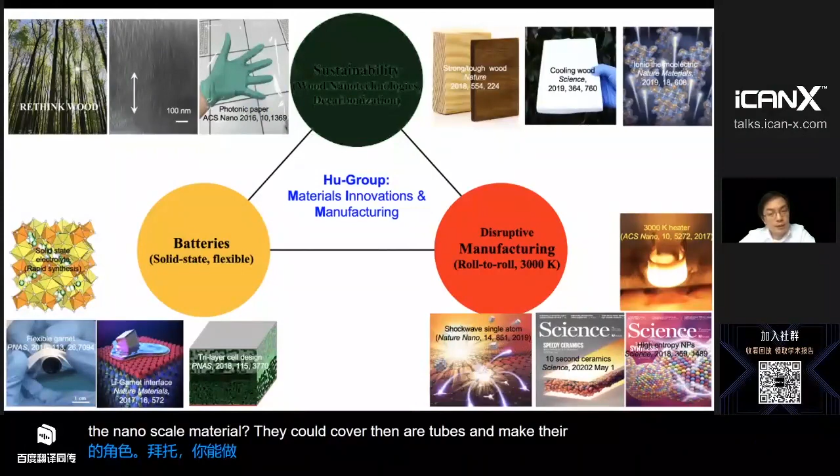So I spent a few years in Silicon Valley working for a startup company doing roll-to-roll printed electronics, basically taking nanoscale materials like carbon nanotubes and making them into inks, and doing this rotary printing for flexible, low-cost electronics. Because of that research experience, very often I take a manufacturing aspect into my research portfolio.

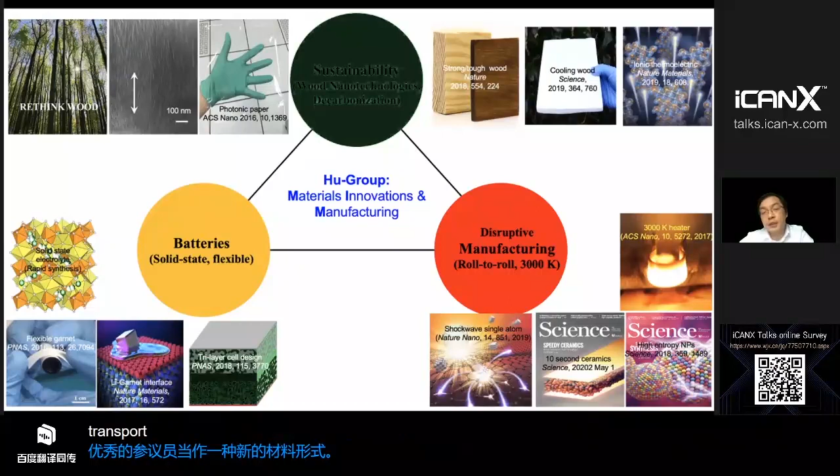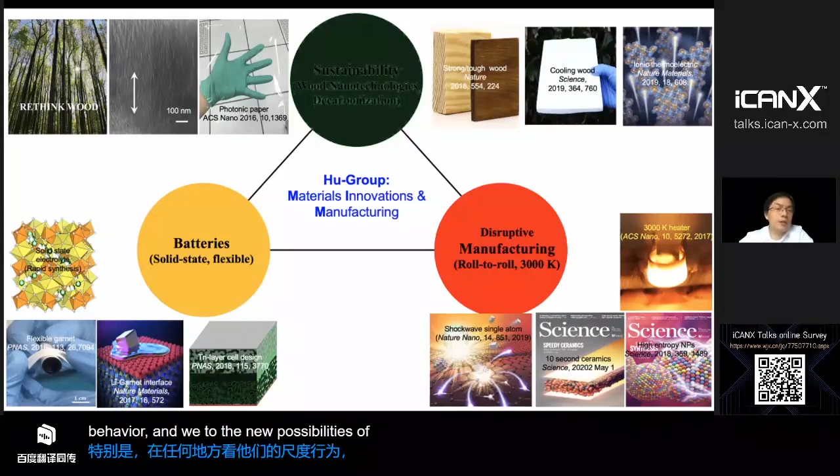Currently my group is working on 3 major research directions. The first one is called wood nanotechnologies, which I will elaborate on today. We treat wood or cellulose as a new material platform, and engineer this material to tailor the optical, mechanical, ion transport and fluid behaviors in these wonderful materials. Particularly, we are looking into the nanoscale behavior, and we are looking into new possibilities of this old material by studying in a new region of this hierarchical structure.

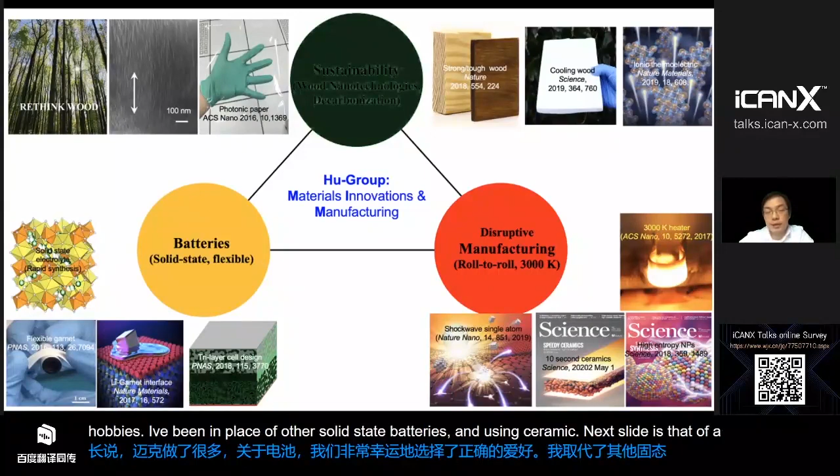The second research my group is doing a lot is about batteries. We're very fortunate to choose the right topic, I believe, about solid state batteries. Using ceramic electrolyte instead of organic electrolyte, we can potentially address the safety and energy density aspect at the same time. Very often when we increase the energy density of a battery, the battery material, the battery device itself becomes potentially more dangerous because you have more energy in a very small volume. If you have a fire because of the organic electrolyte, you have even more severe consequences.

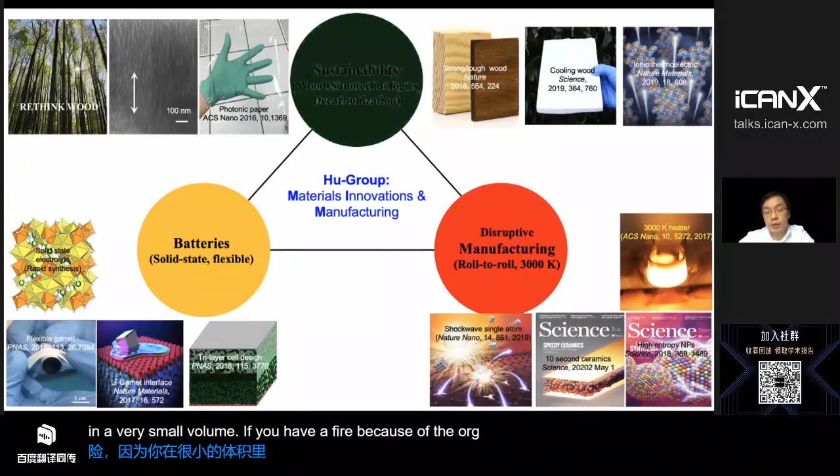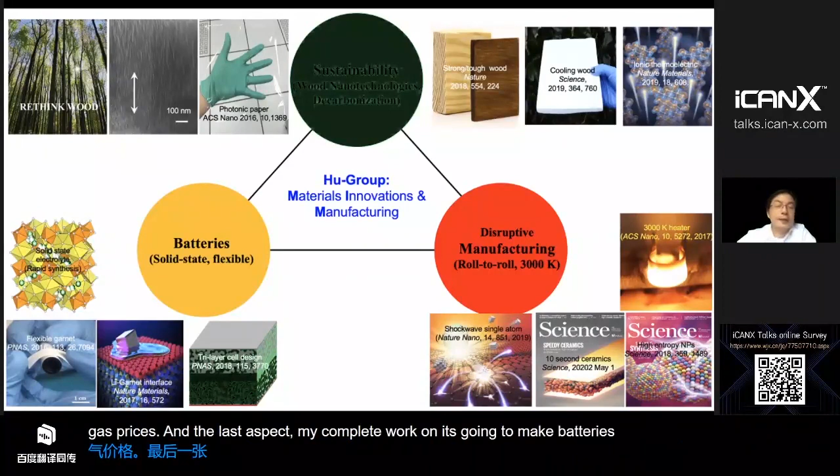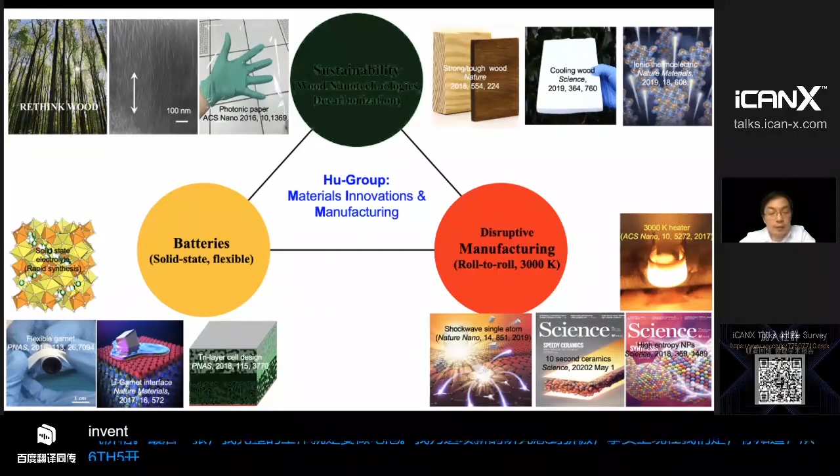And the last aspect my group is working on is called manufacturing. I'm very proud of this new research direction, we started about 5 or 6 years ago, and we invented this process called extreme high temperature thermal shock. By tuning the duration of this high temperature process, we can make all kinds of very interesting materials.

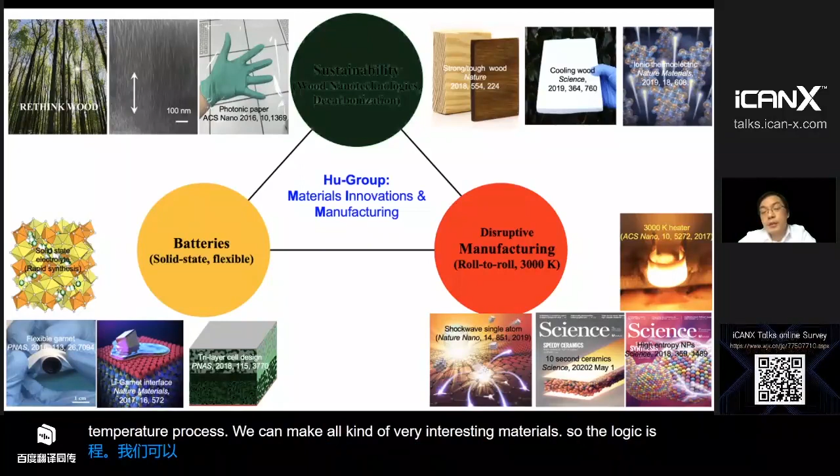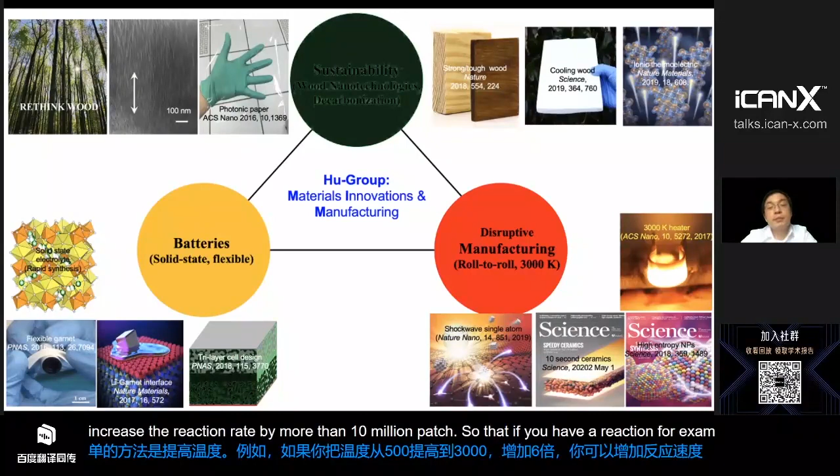The logic is very simple. When you're trying to make new materials, you want to make it fast. The easiest way to increase the speed is to increase the temperature. For example, if you increase the temperature from 500 to 3000, by 6 times, you can increase the reaction rate by more than 10 million times. So if you have a reaction, for example, if you're trying to make a glass window that takes about 10 hours to make, you could potentially make it within a second if you do everything right. So we are actually exploring this new manufacturing platform for new material discoveries, and because it's very fast, you can potentially manufacture it at a very rapid scale.

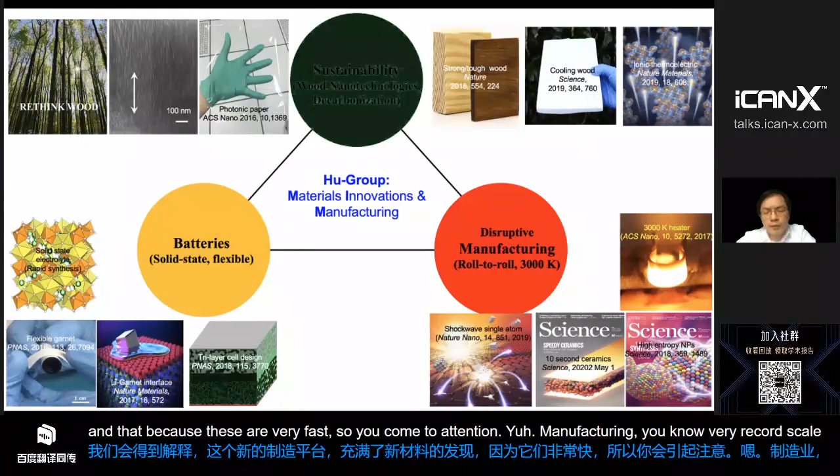I don't have time to talk about this research topic today, but hopefully in the future we have another opportunity to share this research portfolio.

Today I'm going to focus on wood nanotechnologies. If you look into the future, mankind is going to face a lot of challenges, as we're facing right now with this COVID-19 situation. We need to be prepared for the future.

If you look around, there are two kinds of materials. The materials made by nature, like leaves and plants, materials that are made by nature every day, and they are biodegradable - that's one of the key features of this category. The other category is human-made materials like steel and glass, and usually they have very poor biodegradability, they exist in nature for hundreds of years.

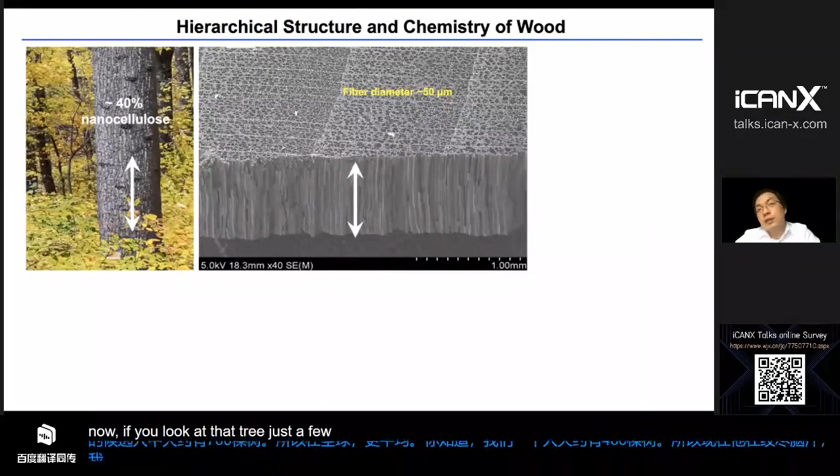So now it's really about how can we use this material. If you look at the tree, just stand in front of it and look, this material has an anisotropic structure, meaning the tree grows in a certain direction. If you zoom in further, you see these interesting porous structures - these tubular materials. You can see the channels here.

These tubular structures are glued together by this so-called lignin - it's like a glue. And that's actually why you have this wonderful mechanical properties, the fluid transport properties in trees. The trees can grow to a very large height without breaking up, even with very large wind blowing on it. People have known this material for thousands of years.

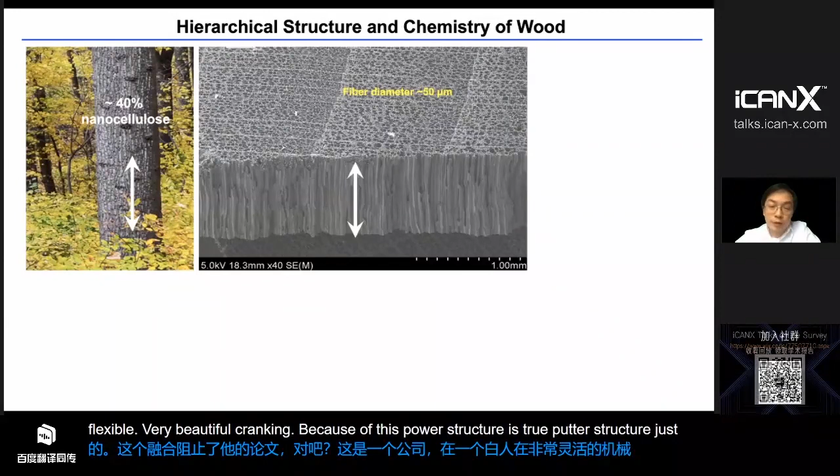If you take the lignin away between the tubes, you get these pulps, the paper pulps. That's actually the building block of this paper. It's completely white, has very good mechanical properties, flexible, very good for printing because of this porous, tubular structure - it's hollow in the very center. So that's how far we have been using these materials.

There has been a lot of development in nanoscience and nanotechnologies, and people are always looking for nanomaterials for enabling new technologies. I was very intrigued by the structures of the cell wall. If you look at the cell wall of these big tubes, you see these tiny nanofibers with a diameter of about 5 nanometers.

That used to be very exciting when you see that. They are partially aligned. If you look into the structure even further, it's just like you keep tearing the fiber - if you have a magical hand and keep tearing it apart, you will see the fiber itself is made of even smaller fibers, and ultimately it's made of glucose chains with a length up to 1 micron, with a lot of hydroxyl groups on the surface.

As I said, this cellulose has a very long molecular chain - the molecular weight is very, very large. It's a macromolecule. And you have the lignin - the lignin itself is much smaller, same as hemicellulose. So I'm a physicist by training, I don't know this material at all.

When I actually got to know this material, I was more interested in how to use this cellulose fiber as a building block, instead of the very complicated chemistry of lignin and hemicellulose. So my research really focused on the cellulose fibers using these materials. We hope that by doing engineering, we can really take advantage of nanoscience and nanotechnology, using this cellulose nanofiber as a platform, while everything else keeps the same.

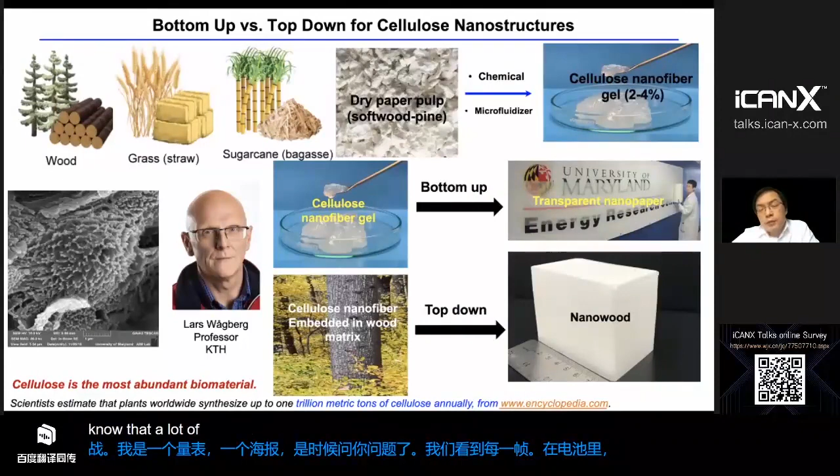I learned this material from Professor Lars Wågberg when I was still a postdoc at Stanford University, doing the battery research. We were trying to use this material for batteries. There has been a lot of development using this cellulose nanofiber, and we have done a lot of work such as transparent nano paper, nanocellulose batteries, and so on.

I won't have time to discuss all of that today. When you use this nanomaterial, even though it's very cheap, we did find a lot of potential challenges, just like any other nanomaterial - it's very hard to process. One major reason is because we need to use a lot of water. For example, in this gel, about 98% is water. So even though the material is cheap and abundant, the use of water and energy to break them down is going to be very expensive.

So about 5 years ago, I started to think about what are the potential manufacturing routes to address these issues. As we looked into that, we found the manufacturing research actually guided us to look into the anisotropic feature of wood, and by doing so we get more opportunities. For example, this is a piece of wood, 100% wood - nothing embedded inside, no dye, no color, no fillers. We get all this aligned cellulose fiber inside this so-called nano wood. Now you can imagine tailoring the channel length, the optical properties, the fluid transport, and so on. I think this becomes a new platform here.

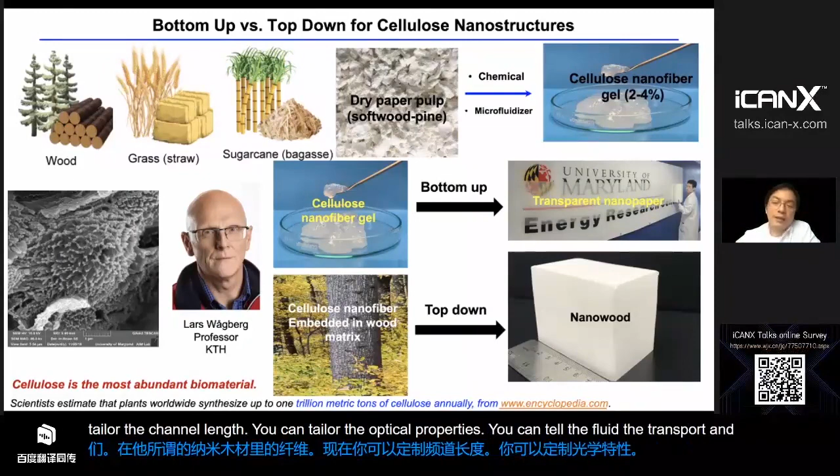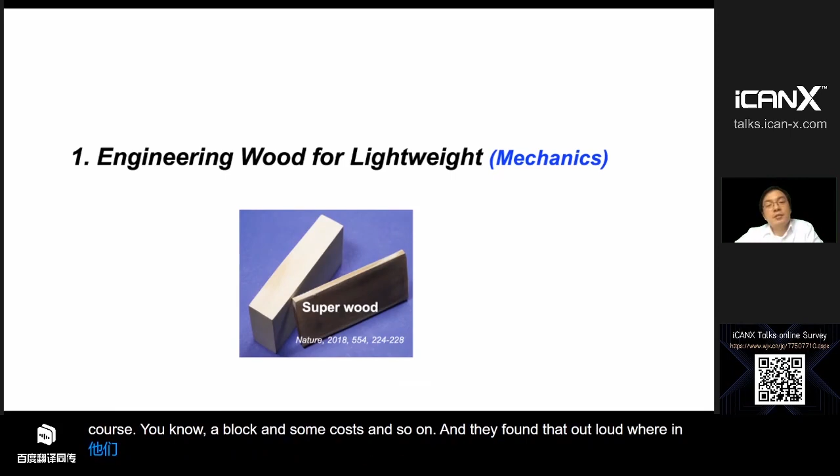So today I'm going to give you 3 examples of how we engineer wood. I personally believe by using this top-down approach instead of bottom-up - where bottom-up means you use nanofiber and build up things, top-down means you use the wood and don't change the wood itself, but do things within the wood, like changing the lignin, changing the hemicellulose, changing the pores, blocking some pores, and so on. We find there is a lot of very interesting physics behind it, and associated with all these structures and physics, there are a lot of potential applications.

So the first work is about lightweight structures, and I did this work through very close collaboration with a very good friend, Professor Teng Li at the University of Maryland, in the mechanical engineering department.

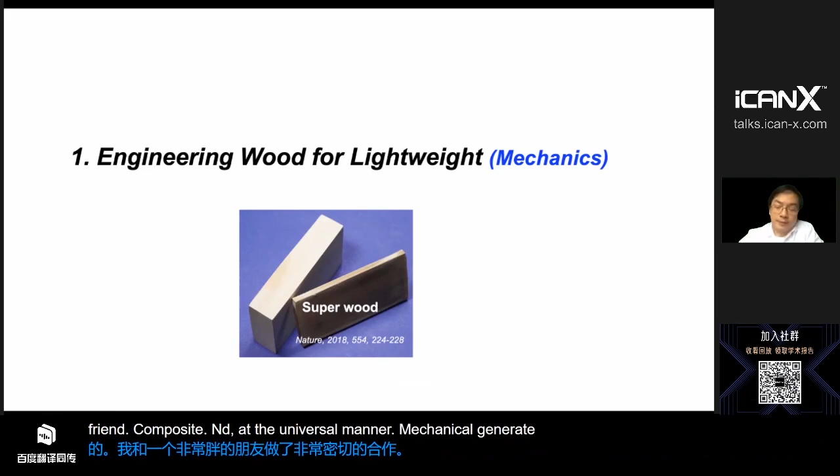Now let's look at the mechanical property of paper or wood. It's actually very boring - the mechanical property of paper is about 20 to 60 megapascals. It's good for printing paper, but you're not going to build a building or a car using paper. And wood's mechanical property is almost the same, like 20 to 60 megapascals. It's good for some buildings, but you're not going to use it for a skyscraper, or for lightweight cars as a frame.

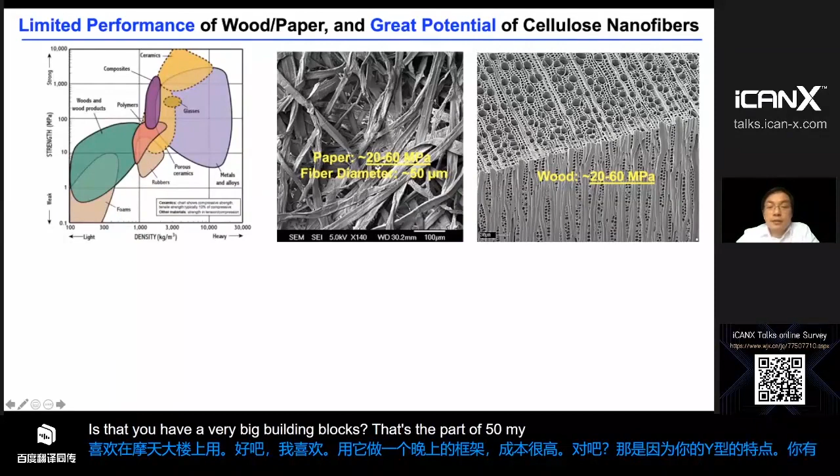That's because of two features here. One is that you have these very big building blocks, about 50 microns. But the second thing is that you have these very porous structures. The porosity is almost about 50% in either structure.

At the same time, remember, these big fibers are made of many, many smaller nanofibers. If you zoom in, the nanofiber has a diameter of about 10 nanometers, and the strength is about 7 gigapascal. The best steel, the strength is about 1 to 2 gigapascal in your car. And the best carbon fiber, the strength is only like 4 gigapascal, at most 5 gigapascal.

Many people are trying to develop new technologies to replace steel, replace carbon fiber. And this material, made by nature every day, has a strength up to 7 gigapascal.

At the same time, this is not held by a primary bond, like a metallic bond as in metals, which takes forever to decompose in nature. This is actually made with hydrogen bonds. The hydrogen bond energy is very, very small, each one. But you have all these hydrogen bonds everywhere - about 2,700 hydrogen bonds per molecule chain per micron.

Because of that, each bond can be broken, so that means this material is very strong. But if you put it into nature, with the help of sun and water, this material can be decomposed. So this gives you a very good combination of excellent mechanical property and biodegradability. It's very good for your use, and it's very good when you're trying to dispose of it.

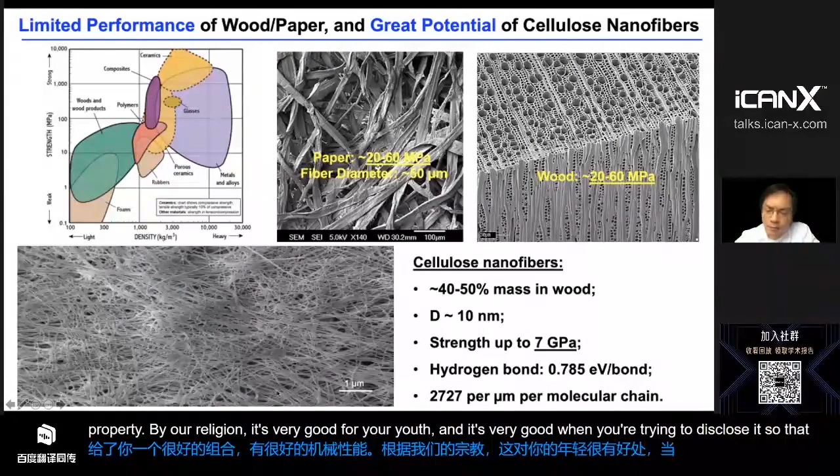So that's another very important feature of nanofiber. Now, if we want to use this nanofiber, what do we do? We have to break them apart.

We've done two kinds of scaling behaviors. One is with diameter - this was done by Hongli Zhu, now a professor at Northeastern University, Boston. We were able to break the fiber down to smaller and smaller scales and make paper again, using these bigger fibers, smaller fibers, and the smallest fibers.

We do this stress strain test and get this ultimate tensile strength when this material starts to break. We found out this mechanical strength indeed follows this kind of quasi-Hall-Petch related equation, meaning if you decrease the diameter of the fiber, you increase the mechanical strength dramatically.

You can almost increase the strength by up to 100 times, because when you decrease the diameter of fibers, you have fewer defects, the material becomes much denser. If you have big fibers, you have limited interaction bond contact areas. If you decrease this diameter, you have more interaction and smaller defects, and so on.

The other thing is the toughness, or the energy to break this material. You do the integral of the stress strain curve, and you get this toughness. We found the toughness also increases as you decrease the diameter of the fiber, and this is untraditional.

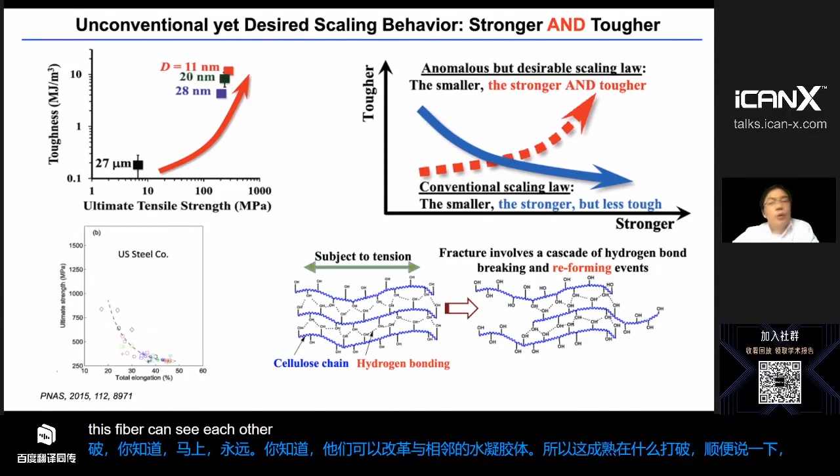We also studied another kind of scaling behavior: alignment. If you try to increase the mechanical property of fiber materials, certain contact points give it mechanical strength. If you align them, you maximize the contact area and can increase the mechanical strength. This indeed happened - we carried out this research using bacterial cellulose fibers.

And we stretch them when it's still wet in water, and we take it out and dry it. Then the hydrogen bonds will be formed, and you have this increased mechanical strength up to even 1 gigapascal. This is actually better than many steels, using this cellulose, the bio-based material. We published this paper quite a few years ago.

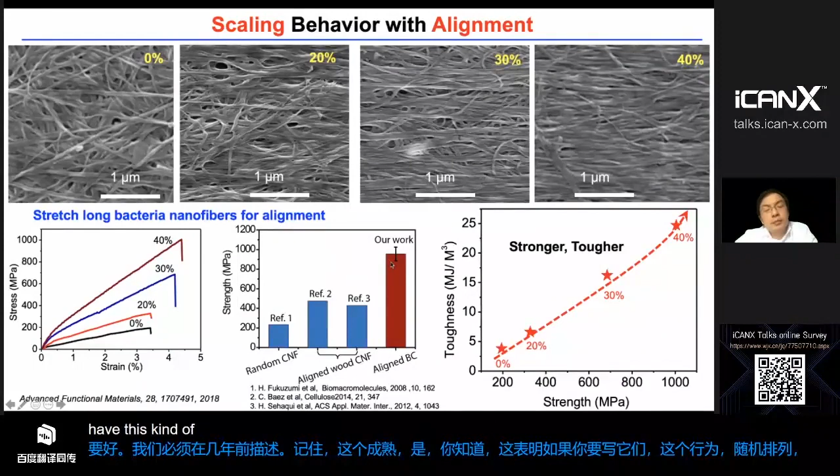Remember, this material shows you that if you have a random arrangement, this is the mechanical property you have. If you have alignment, you have this kind of much improved mechanical strength. The same thing is actually true for the toughness.

So now we know that in order to use these cellulose nanofibers, we want two things. We want the nanofiber, and we want to use them in an aligned fashion. And coming back to my original point, we always have manufacturing challenges. For any technology to be useful, you have to overcome the manufacturing challenges.

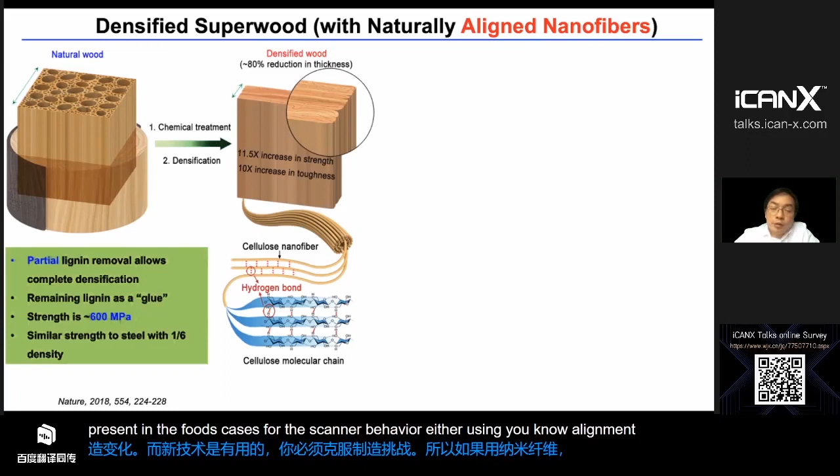So if you use nanofiber, using the bottom-up approach as I presented in the previous two cases for the scaling behavior, either using alignment or using a microfluidizer to break them apart, that uses about 98% water. And that's a lot of energy associated with that.

Remember, cellulose very often comes from trees, and they are actually partially aligned. Wood is actually an anisotropic structure. They grow in certain directions. And the building block is cellulose nanofibers.

We are very lucky to have proposed this concept quite a few years ago. We have a patent on this: let's use the nanofiber as they are in wood, but let's try not to follow what the paper industry is doing.

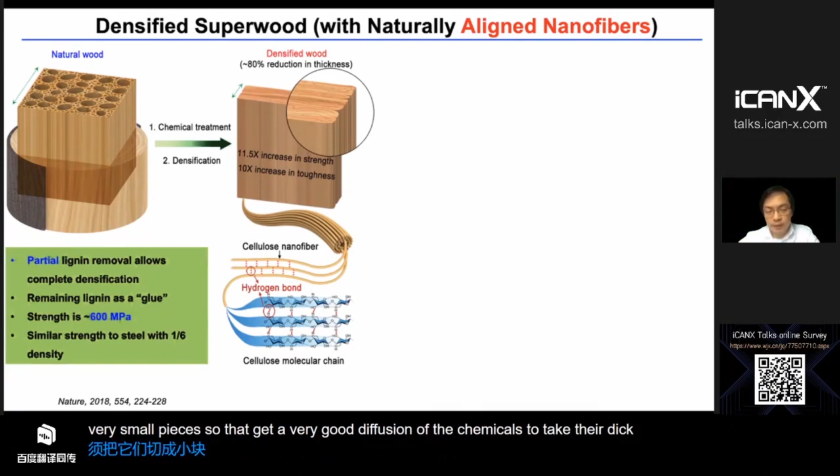In the paper industry, they take the wood, cut it into small pieces, and do this pulp treatment to remove the lignin. They have to cut them into very small pieces to get good diffusion of the chemicals to take the lignin away. But in this case, we want to use this anisotropic structure.

So in this innovation, we remove some of the lignin, so the wood itself becomes soft. At the same time, we apply mechanical force to break them down, to break down the channels, and you get this densified structure. So you have all these aligned nanofibers inside, and they are aligned.

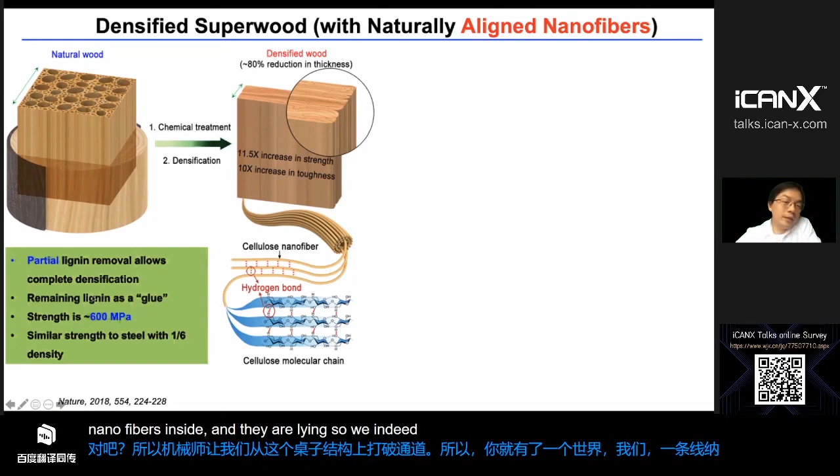So we indeed get much better mechanical properties, and at the same time the whole structure has a density of about 1.3 to 1.6, 1.5 grams per centimeter cubed. It's much denser than the regular starting wood, but the density is still 6 times smaller than most steels. So this is what happened in the laboratory.

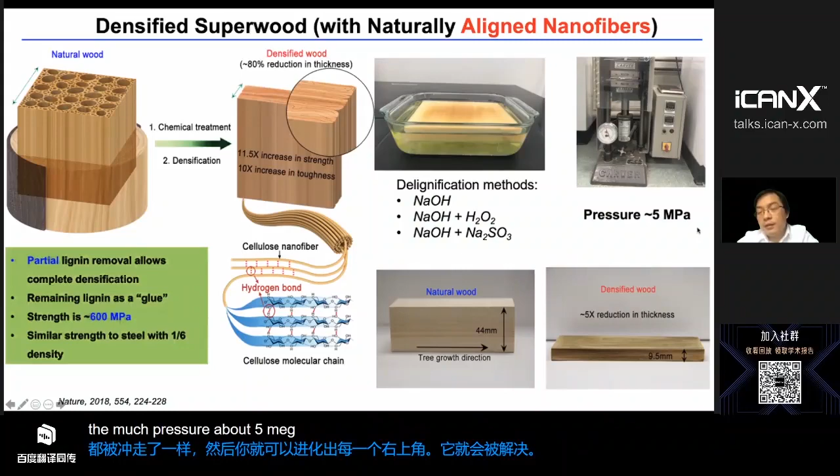It's actually very simple. You just take the wood, cook it using chemicals and some temperature, and the lignin—just like you wash your cloth—will be leached out. The wood becomes soft, and you press it using not much pressure, about 5 megapascals. Again, during the drying process, the hydrogen bonds form, and you have this very strong, tough material.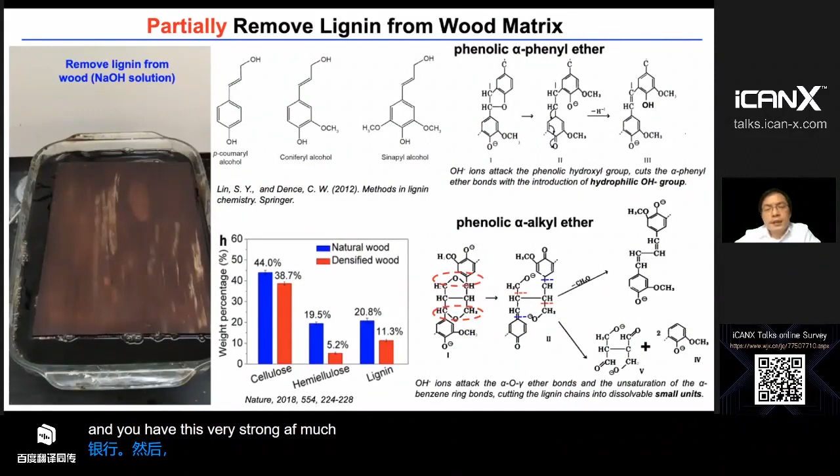So this is what happened in the laboratory, again just like washing cloth. What's happening here is that we're using sodium hydroxide. This is the lignin building block—it's actually a very complex amorphous structure.

In one case, they can actually introduce hydrophilic groups, meaning this material will start to like water and can dissolve into it. In the other case, you can use hydroxide groups to break this kind of alkyl ether group, breaking down these very large lignin macromolecules into small molecules. When they're small, they're easier to leach out and dissolve into water, so you can remove the very rigid lignin.

So this is what happened in the composition studies. The lignin remaining is about 50% of the original lignin. The cellulose in this case still retains most of its original mass. That's what we wanted—we want to use the cellulose, not the lignin, because lignin causes problems for densification.

So we do this mechanical stress-strain test, comparing natural wood and densified wood. You can see the tensile strength is increased more than 10 times, and the toughness is also increased about 10 times.

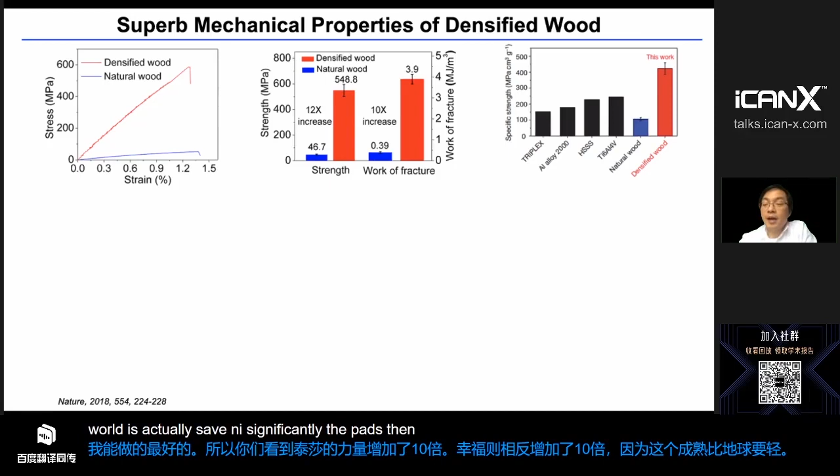Because this material is very lightweight compared to steels and even the best lightweight metals, the specific strength of this densified wood is actually significantly better than titanium alloy lightweight metals.

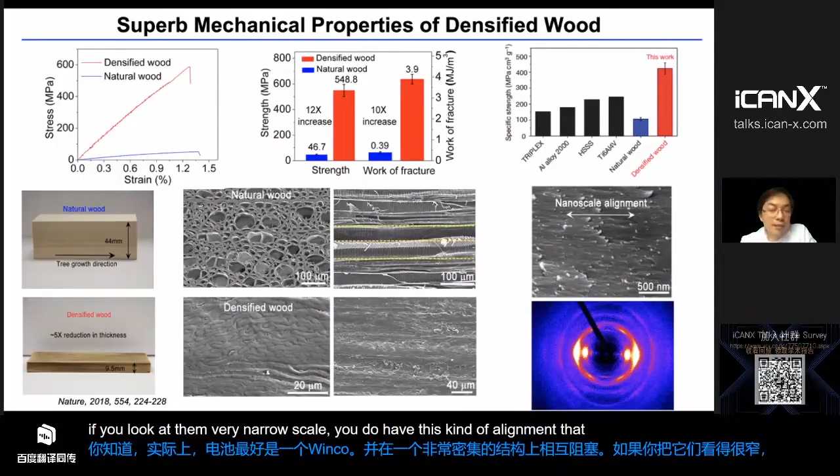If we look into the structure, you see this is natural wood with very big channels. They are actually defects from a mechanical point of view. You see how the cell walls are wrinkled and lock each other, forming very dense structures. And if you look at the nanoscale, you have this alignment that maximizes the interactions between the building blocks.

We've also done a lot of other tests, such as bending in different directions, and we increased strength by a lot compared with natural wood. For building applications, we care more about compression. We compress in three different directions, like in the growth direction, perpendicular to the growth direction, and so on. They all increased dramatically compared to natural wood.

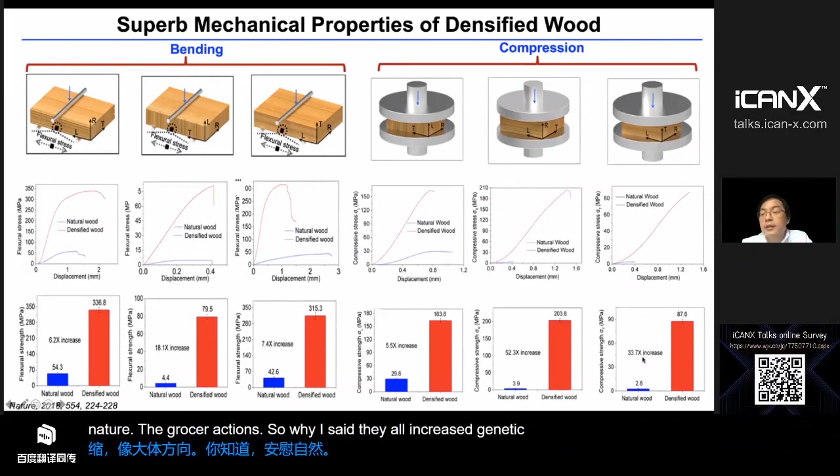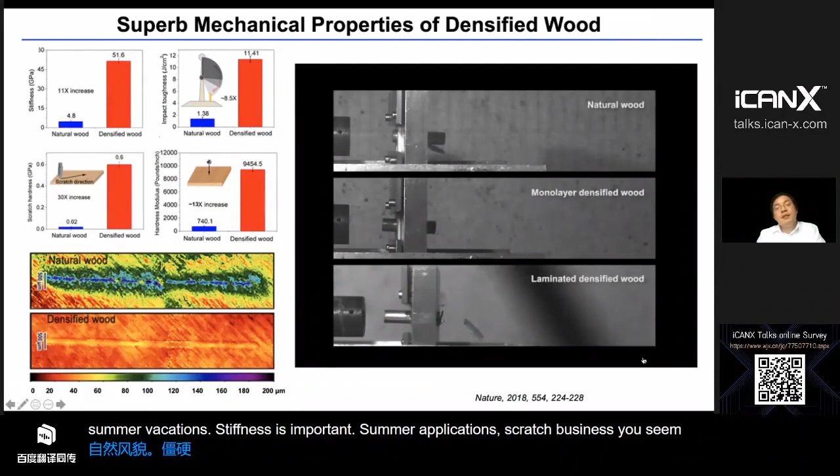For some applications, stiffness is important. For some, scratch resistance is important. And sometimes impact resistance is important. We've done some bullet tests, and we see the densified wood can catch the bullet in different ways. With natural wood, the bullet just passes through it. So what this test tells us is that we indeed improve the mechanical properties in all aspects.

And this really comes from the structure of these materials. From the macroscopic scale, from the large scale, you have these aligned structures, very dense structures without pores. It's made of tubular structures, where the cell wall is closed. So they also form this kind of very good laminate structure, and they are also aligned. Each tube is basically pressed into something like a pellet.

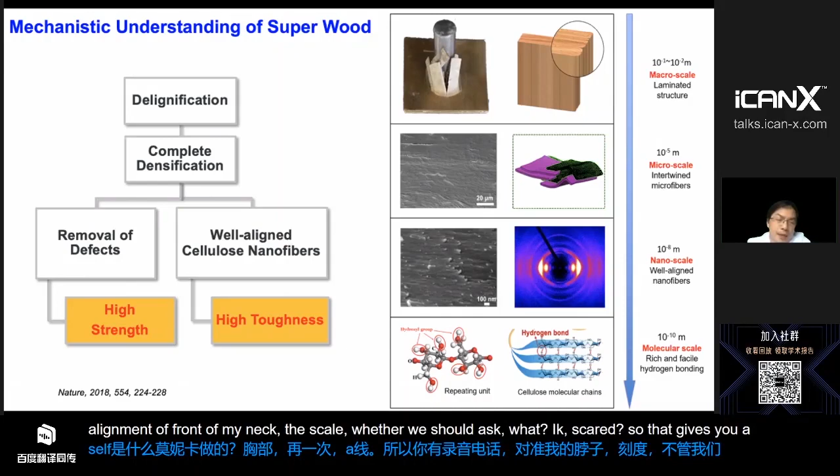And you have these nanoscale fibers - that's the building block. Each nanofiber itself is made of all these molecular chains, and again, they're aligned. So you have hierarchical alignment from the molecular scale all the way to the macroscopic scale. That gives you all this mechanical strength and toughness. We believe the strength comes from the removal of defects, and this aligned hydrogen bond-based structure gives you this very good toughness.

And this process is actually very universal. That means you can apply this process to different kinds of trees - either oak trees, poplar, pine, very cheap fast-growth trees, or very expensive dense trees. Ultimately, all these trees have very similar building blocks. The difference is mainly in the macroscopic scale.

They have some with big pores, some with smaller pores, but after we densify it, they become the same structure. They're all dense. The building block is all cellulose nanofibers, and you have lignin inside. So that basically gives you a very universal kind of mechanical behavior.

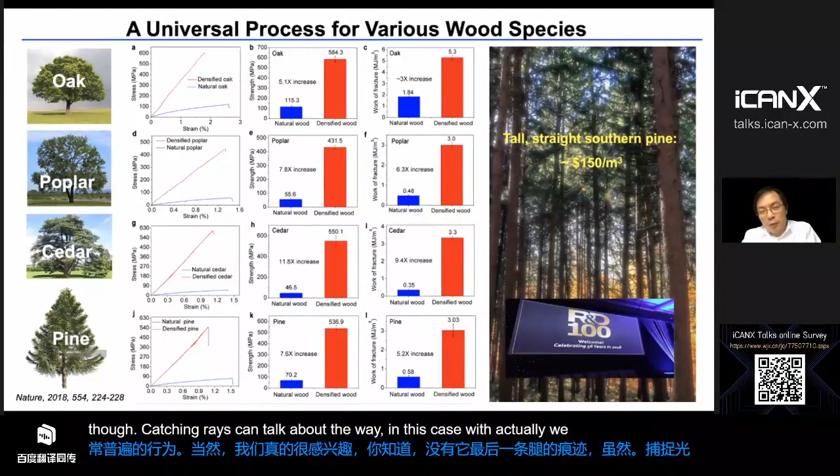And of course, we're really interested in very straight trees with less leaves - I know Professor Gino is going to talk about the leaves. In this case, we want just the trunk itself. The cost is about $150 per cubic meter, and we actually won the R&D 100 award for this.

So I think superwood can really enable a lot of technology possibilities here. And we are lucky to get funding from the DOE in the United States to work on car integrations. The idea is very simple.

When you drive your car, think about this - your car weighs more than yourself. So when you say I'm going to drive a car, you are really driving a car, not driving yourself. But to save weight, you really want to drive yourself - but then you don't get the safety. So you want a lightweight car that also has very good mechanical strength and toughness.

That's the motivation. On average, if you save weight by 10%, you can increase energy efficiency by about 8%. And if you're talking about flight systems, like airplanes, it's even more - if you save weight, you can save more fuel and more cost. And also for skyscraper buildings.

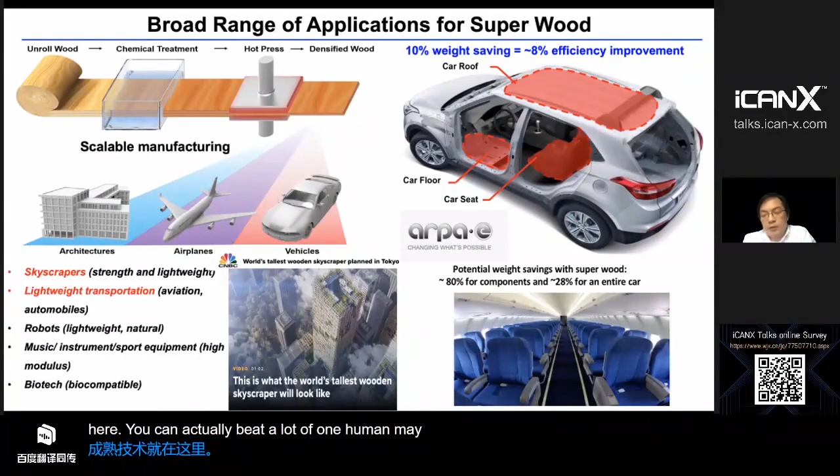Transportation—cars, airplanes—is about 40% of total energy consumption. When you're on the road, taking the train, driving your car, you're spending a lot of energy. When you're not traveling, you're usually inside a building, and building consumption is also about 40% of total energy consumption.

So I'm going to tell you how we can engineer wood for building technologies. In this case we care about the light effect and thermal comfort—how can we see things in the daytime, how can we have the best lighting effect, and how can we have the best thermal comfort?

If you look at a building, you have windows. A window is a very bad component in terms of energy efficiency, but you like a window because it gives you visibility, comfort, and so on. The other major energy leakage is your envelope, the walls—either stainless steel or regular wood—which don't give you the best thermal protection.

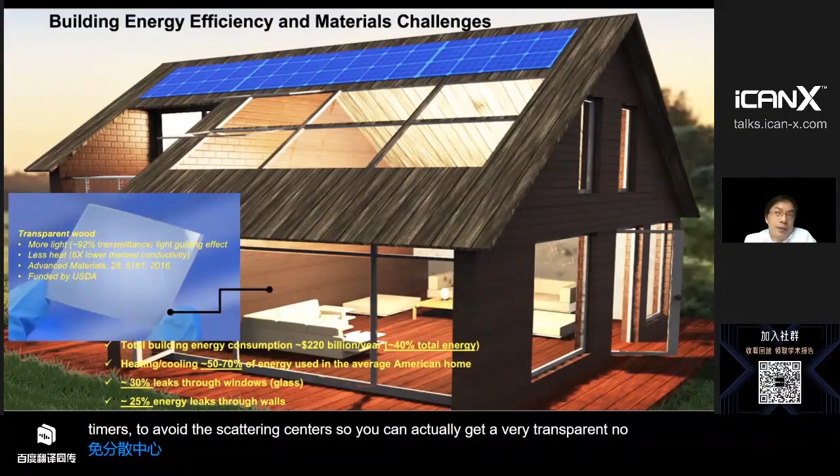My group has been working on these kinds of technologies for quite a few years. The first work was by Mingwei Zhu, a visiting scholar in my group at that time. We invented this so-called transparent wood. Basically, we remove the lignin that absorbs light and fill it with cellulose or polymers to avoid scattering centers. So you can get a very transparent, very low thermal conductivity wood that maintains optical comfort but avoids thermal leakage and increases energy efficiency.

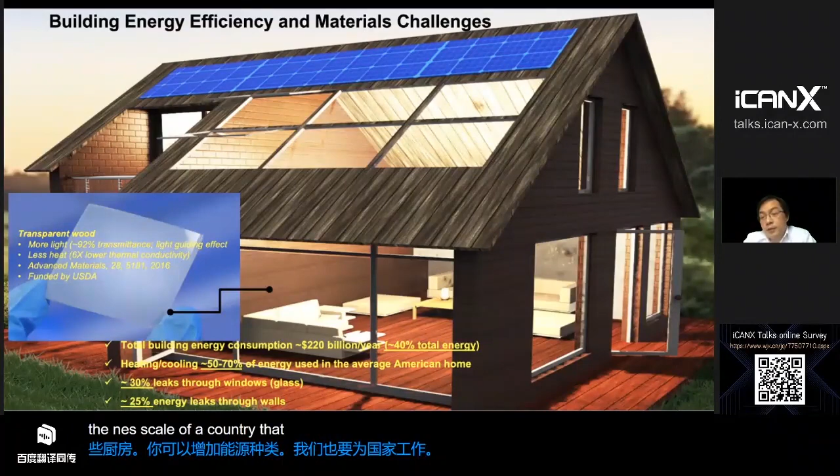We've also done work on thermal insulation wood. It's a structural material, and in this case we're talking about a length scale of about 100 nanometers for thermal management. By doing so, we can lower the thermal conductivity dramatically. Now this project is funded by the DOE BTO office, and we're trying to commercialize this technology through InventWood as well.

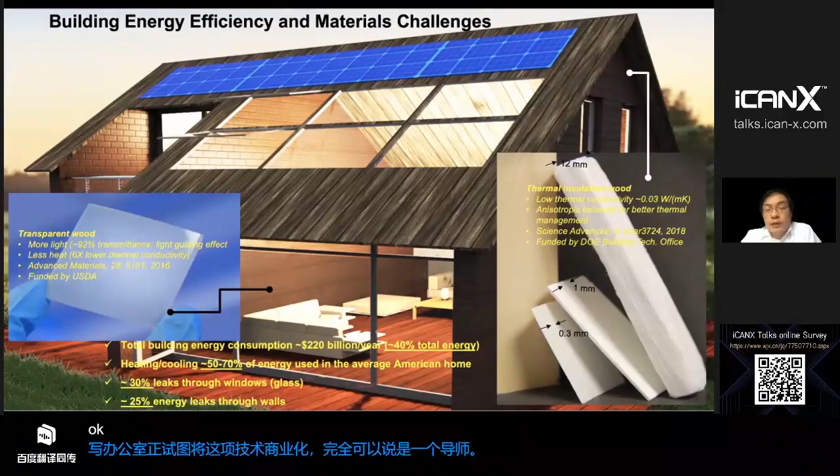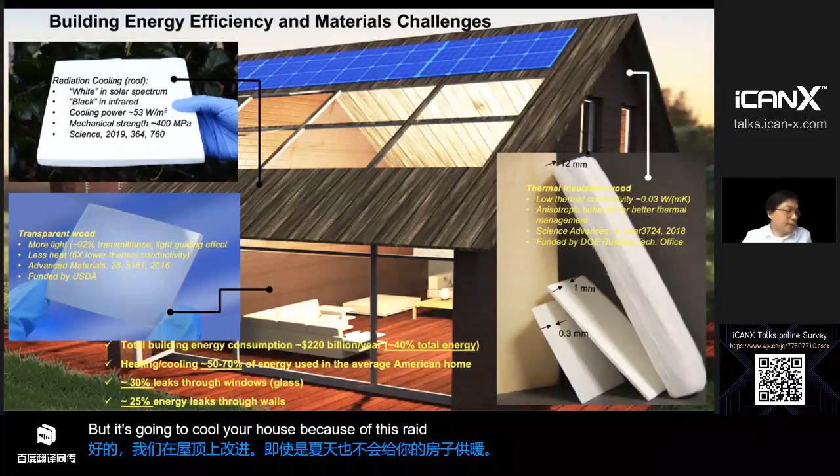So today I'm going to focus on this so-called radiative cooling wood. This is a cooling wood that, when you put it on a roof, is not going to heat your house even in the hottest summer—it's going to cool your house because of this radiation effect. Because of time, I'm going to speak relatively fast for this concept.

Now think about this: this is your house, this is the building, this is the cloud, and far, far away is the universe—that's very cold. Then you have the sun, which is very hot, about 6,000 Kelvin. So if there's no sun, you should always feel cold because the universe is so cold.

If you look at this cloud, you have transmission windows, and from 8 to 13 microns you have very high transmitting windows. Now let's say your house is at room temperature, say 300 Kelvin, and this is the black body radiation curve. This window is transparent, so if there's no sun, your house is going to radiate all the heat through this transparent window, and you're going to have a very cool building, even in the summer.

But the problem is that in the summer you have this high-flux energy input from the solar radiation, which is also black body radiation at about 6,000 Kelvin, so its center is in the range of visible light. So cooling your house is really about how we can reduce the heating and increase the cooling, so overall you have a net output of energy instead of input into your building. That's why we want to make this material white, so it doesn't absorb the solar energy.

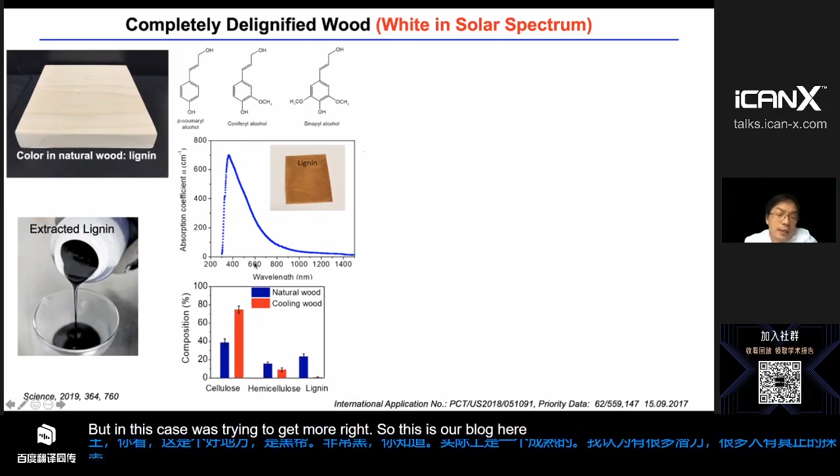So this is absorption of the lignin, and it's just black, right? That's why, if you put the wood on the roof, it's going to absorb the sun. It's going to heat your house, which is bad from an energy efficiency point of view in the summer. So this is actually a completely delignified wood.

We demonstrated this a few years ago. You may think this is trivial, but actually removing the lignin from a very big piece of wood without destroying the structure is very, very challenging. There's nothing to hold them together if you remove it, right? Then hydrogen bonds form when you drive the water away. You have to get them apart, but they're still very porous. So it's actually a very complicated task.

In this case, we have a white color because we still have a lot of scattering because of this macroscopic arrangement, right? So now let's look at the spectrum. It's very white—it's very obvious, right?

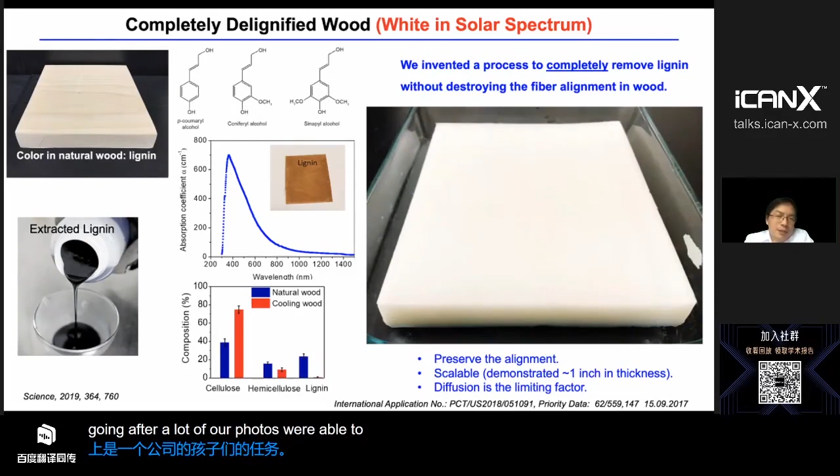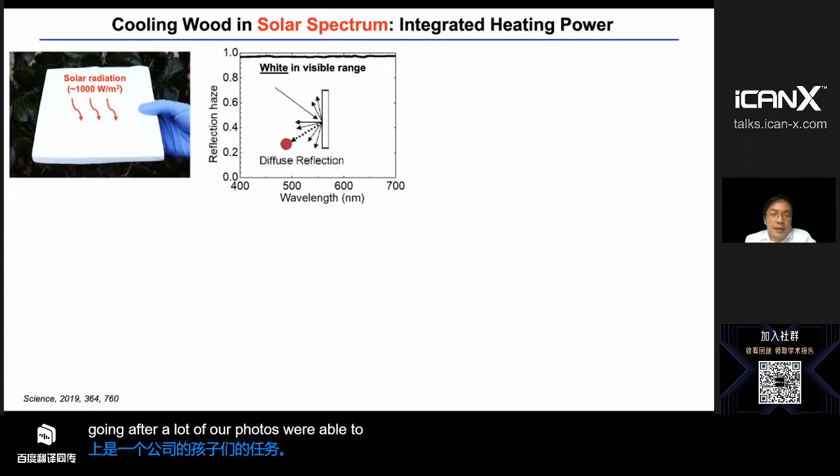And then we measure the reflections. It actually has a very high haze, meaning reflection scattered in all directions. And if you look at the transmittance, of course it's very white, so the transmittance is very, very small, almost zero. And there's very, very small absorption as well.

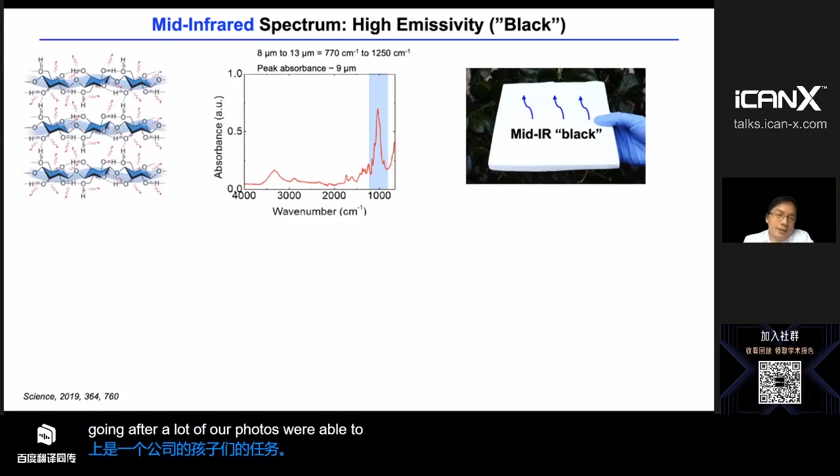Now look at the infrared. This material is actually completely black. You and I wouldn't believe so because it looks white in the visible. But this material has a lot of functional groups—CO, CH, OH bonds—and they all vibrate in the infrared. That means they're going to absorb energy in the infrared. So when you have very high absorption, that means you're going to have very high emission as well. The absorptivity is the same as the emissivity.

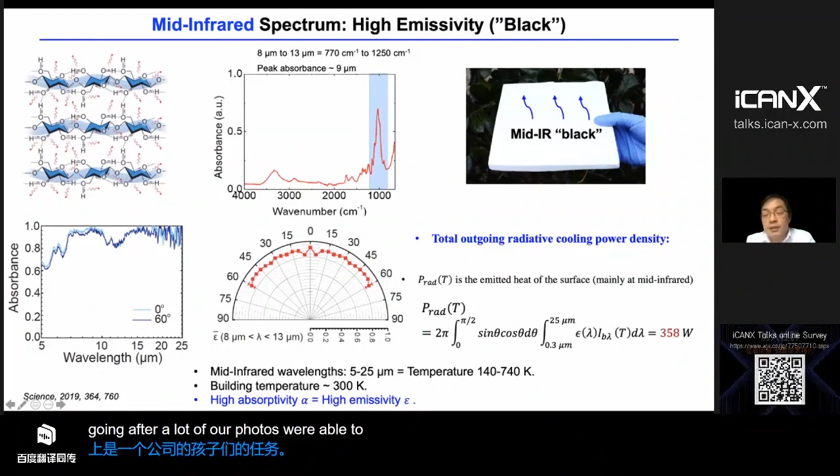Because of that, you're going to have a very large cooling effect. This is the infrared range. If you do the integral from visible all the way to the infrared, it's mainly the infrared range that gives you this huge cooling power—the energy goes away from your roof. So this number is much larger than the absorption, which was 53 in the previous slide.

Now let's add everything together. In the real case, you have convection, conduction, and back radiation from the environment and so on. But taking this wide window, the 8 to 13 micron window, if you put all these things together, you still get a net emission power of about 58 watts. So for a 10% solar cell, you get about 100 watts for about 8 to 10 hours, but this is a 24-hour operation. So this is actually even better than most solar cells from a 24-hour operation point of view.

This work was done through collaboration with Ronggui Yang and Xiaobo Yin from University of Colorado at that time. We did some real-time tests and confirmed the measurement, which agreed with the calculations and so on.

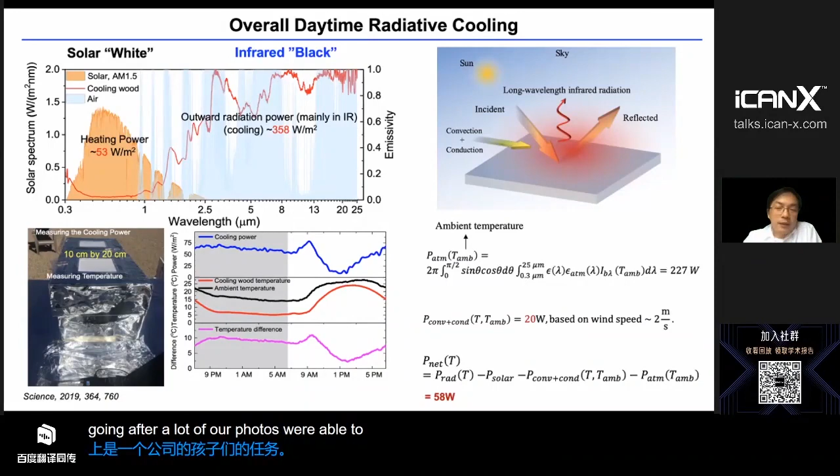So this material, at the end of the day, is very different from other radiation cooling materials. The radiation cooling concept really started with Professor Shanhui Fan from Stanford University using semiconductor structures, and there are quite other interesting works using polymer beads and multi-layer structures and so on.

This material is wood. So intrinsically, it's a structural material. And for buildings, you want the mechanical strength, you want the structure material. So we say that in this case, the mechanical strength is also like 400 megapascals, and it's very much better in terms of scratch resistance. When you use it for the building, you care about the scratch. People are going to scratch it. You have cats, things like that. You care about scratch resistance and other kinds of mechanical properties as well.

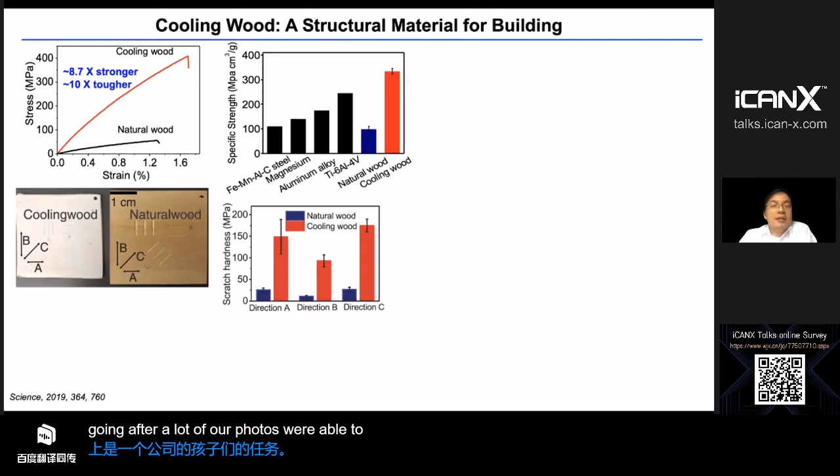And this is the specific mechanical strength. Just like before, it's also better than lightweight metals. And this material also has very, very beautiful colors, just like pure white. I think this may have applications even beyond this so-called radiation cooling.

We've done this building energy efficiency calculation through collaboration with Professor Jelena Srebric at the University of Maryland. The idea is that using this material in certain regions, you can save energy up to 35%, for certain areas like Austin, Phoenix, which only have very dry and hot weather.

So this really indicates, if we can engineer this material to play with the optical properties like transparent wood, the thermal properties like insulation wood, or this light and thermal coupling, you can have this cooling wood. And this is just one second example.

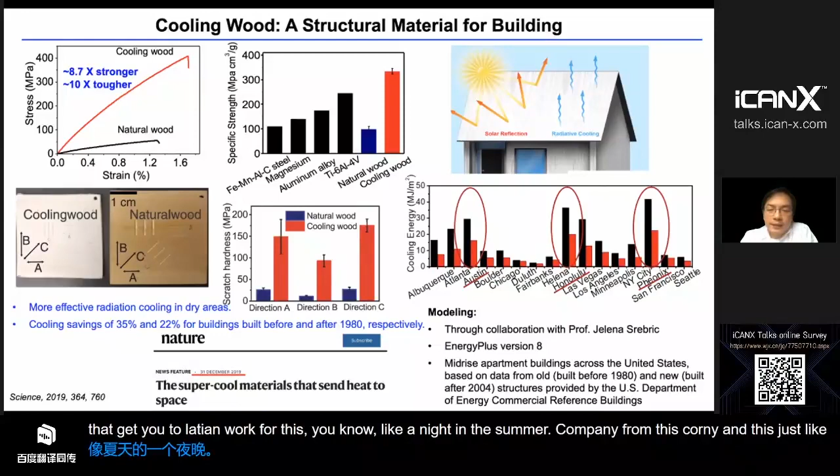So in addition to superwood, cooling wood, I'm going to give the last example very quickly. It's called ionic wood, okay? Or called nanoionic wood or fluidic wood. It's about using wood to transport ions, transport water, transport other fluidics in a guided version with much enhanced speed, with much better regulation.

For example, if we make a channel much smaller, we can selectively transport one ion versus the other kind of ions. So you can start to build a charge on one side, and you can also promote the transfer number, for example in lithium-ion batteries. That is always the key to getting fast charge batteries.

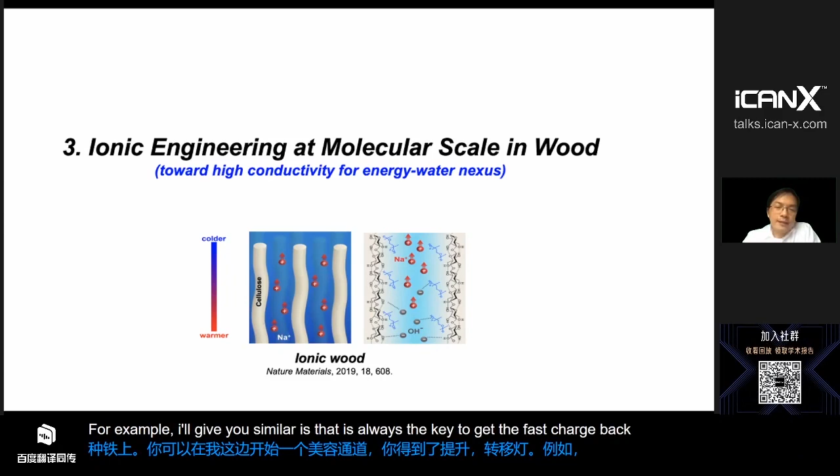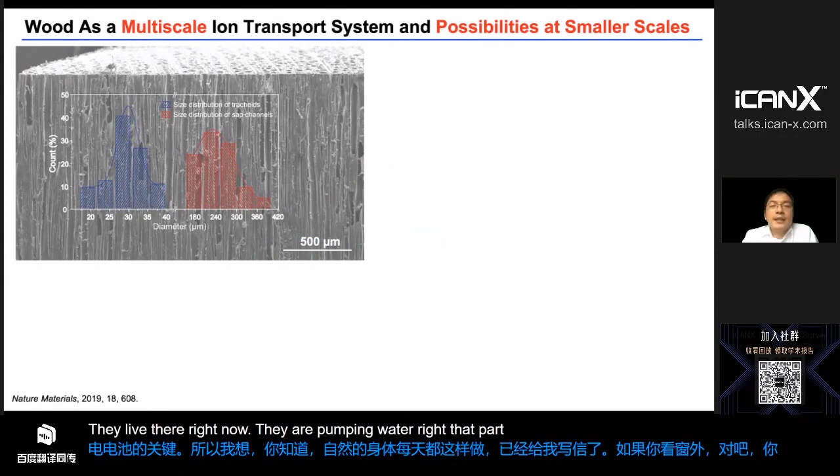So I think natural wood is doing this every day already. Right? I mean, if you look outside your window, you have the trees. They are, right now, pumping water, pumping potassium, sodium ions as nutrients for the trees to grow.

And they have very interesting hierarchical structures. They have these larger pore diameter channels, and they have smaller channels, and they have pits on the cell walls and so on. I think there are a lot of works done on these classical materials. And when we enter this field, we ask this kind of question:

How can we use this nanoscale behavior? For example, in this case, we open them up. We charge the nanofibers apart, so they start to repel each other. You open up the small channels, and you get this so-called nanoionic transport behavior. And remember, this material has a lot of hydroxyl groups. That's the glucose chains, right?

So can we modify the structure to make them more surface charged when they soak in water? They are more likely to be dissociated, so you have more surface charge, negative surface charge. Then we give them chemical modifications in addition to the physical modifications. And hopefully we can also benefit from these hierarchical structures.

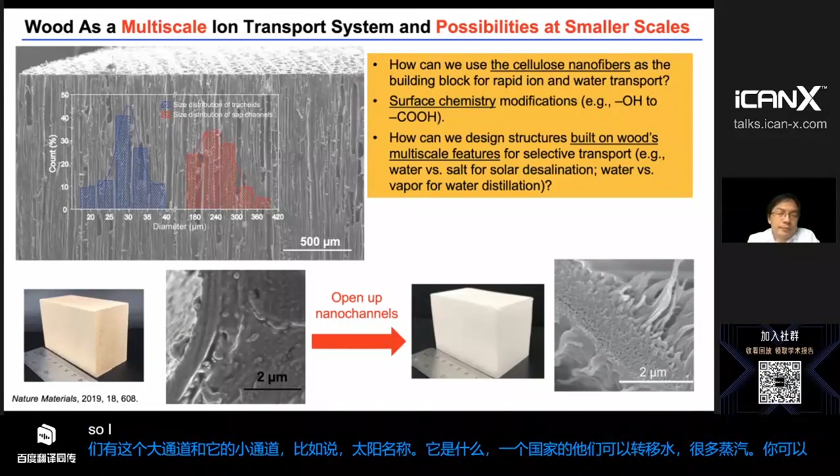They have this big channel and smaller channels for things such as solar desalination, water distillation. They can transport the water, not the vapor. You can transport this ion, not that ion, and so on. So I'll give you a very quick example about solar desalination.

In this case, the idea is to let light hit the surface of the wood. The wood surface is blackened by carbonization—very black, but only on the very top surface. So when the light hits the surface, it's going to be absorbed. And because wood has very poor thermal conductivity, it's a porous material.

So the heat is going to be focused on the surface. The surface will become very hot. The vapor will be formed, will be evaporated. And the water, let's say, under the wood from the ocean, for example, is going to be pumped up through these channels of the wood. So now you have this continuous flux from the seawater to clean vapor. You can constantly generate clean water using this solar energy.

So we've done this using wood as well. Just like many other materials, maybe many people don't talk about it in the beginning.

Now people pay more and more attention to this: this kind of device will operate very well, but after a certain time, the salt will start to accumulate, and it's going to make this black material completely white. Then there's no absorption, the channels are blocked. So you have this so-called salt accumulation problem, right?

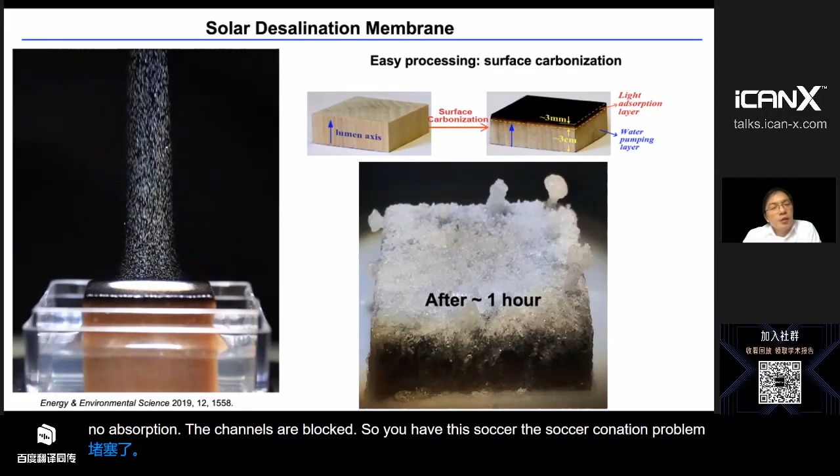So here we're using this balsa wood. In balsa wood, they have this bimodular distribution. You have very large pores, up to hundreds of microns, and you have very tiny pores, like 30 microns. And then in the cell, you have all these pit structures.

So the idea here is that solar energy heats the surface, the water will be evaporated through these small channels, and the salts will dissolve back through these big channels. We've done some modeling, we've done some experiments, and we indeed found that if you use balsa wood, this bimodular structure can help you resolve the salt accumulation problem. I think this is actually very, very important from the long-time operation point of view.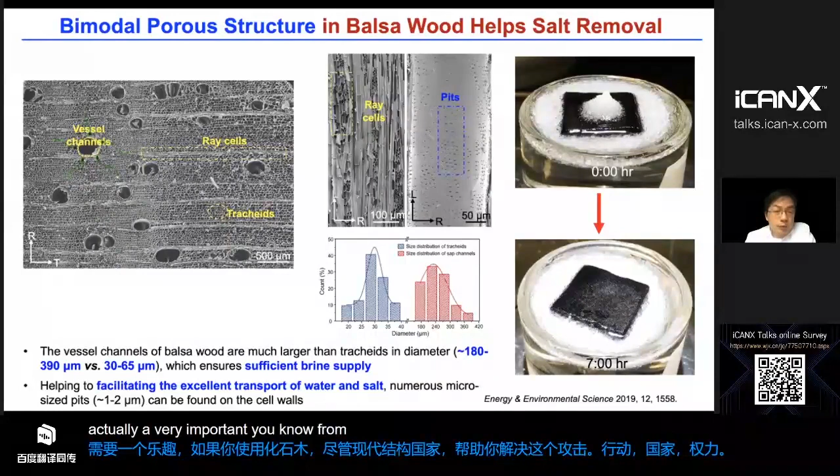So that's actually about the big channels, right? And things become more interesting at the nano size. I just want to give you a very quick example. I think this is just the beginning of many, many possibilities. In this case, think about: if you have a charged surface, and you immerse it into an ionic solution...

...like a sodium chloride salt solution, right? Let's say the surface of the wood is electrically charged. It's going to attract the positive ions to the surface. They form this so-called double layer with a distance that's about 1 nanometer for a typical sodium hydroxide solution. So in the traditional wood, the channel is like hundreds of microns, that's a macroscopic region, right? So there's no regulation, ion transport is just like transport through a bulk solution. The cell wall, the wood wall, has nothing to do with it.

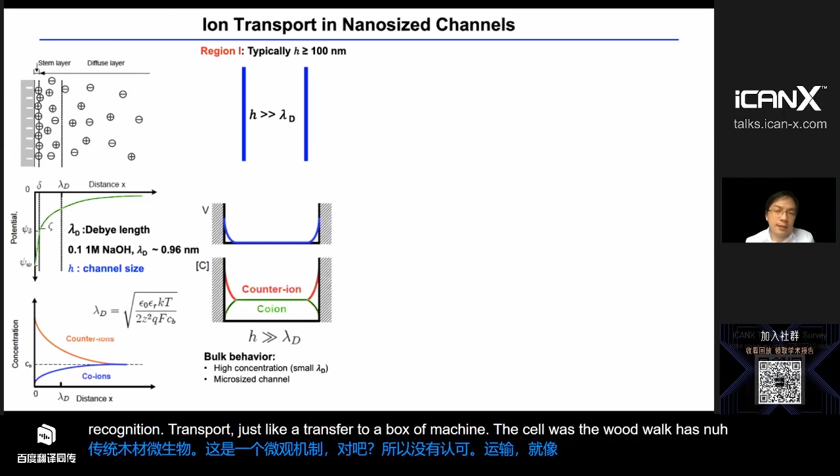Okay, now let's say we open up the nano channels. Now the channel diameter is very, very small, a few nanometers, right? So in this case, when the ion is trying to transport through this very small channel, it's just like you trying to go through a very small aisle with two walls. You're going to be influenced by whatever is on the surface of the channel, right?

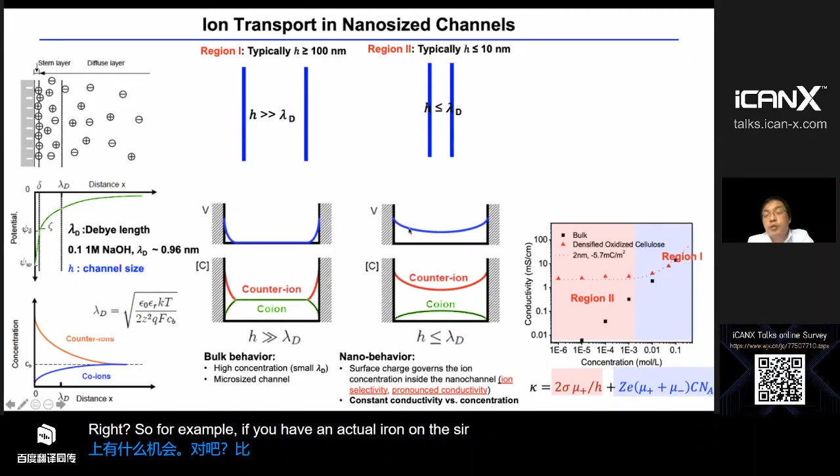So for example, if you have a negative ion on the surface, it's going to repel the negative ions trying to go through, and attract more of the positive ions to go through. So this is so-called nanoionics, right? If you study this kind of behavior, this is what happens here.

The double layer distance decreases as you increase the salt concentration. So this is the concentration of the salt. When the concentration is very high, you enter into this linear regime, right? The transport is the same as the bulk solution, there's nothing interesting here. But when you decrease the concentration...

...or when you decrease the diameter of the channel, you're going to have much enhanced conductivity, because the ions inside the channel are going to always match the surface concentration, right? So no matter how little ion you have in the bulk, you always have a lot of ions actually in the channels. So this actually becomes extremely interesting already.

And I believe this material can be even more interesting when you go to the molecular scale, which I don't have time to talk about today.

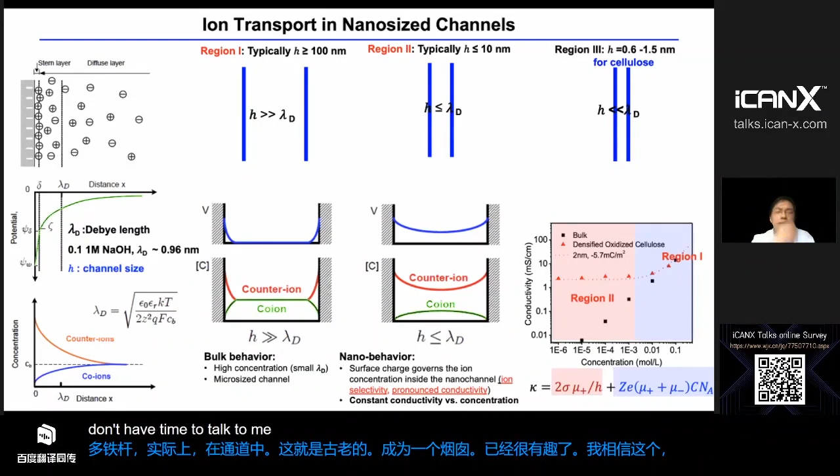Okay, so in these nanofibers we indeed observe this behavior, this classical behavior called nanoionic behavior, right? So this is the processed cellulose nanofibers, or processed nano wood. And you have this transport behavior: this is the nano behavior, this is the bulk behavior, right?

As I said, we can even increase the surface charge by changing the hydroxyl groups to carboxylate groups. This group is even more easy to be dissociated, so you have more surface charge. So even with the same diameter, you have more surface charge on the cell wall, you have more charge in the channel.

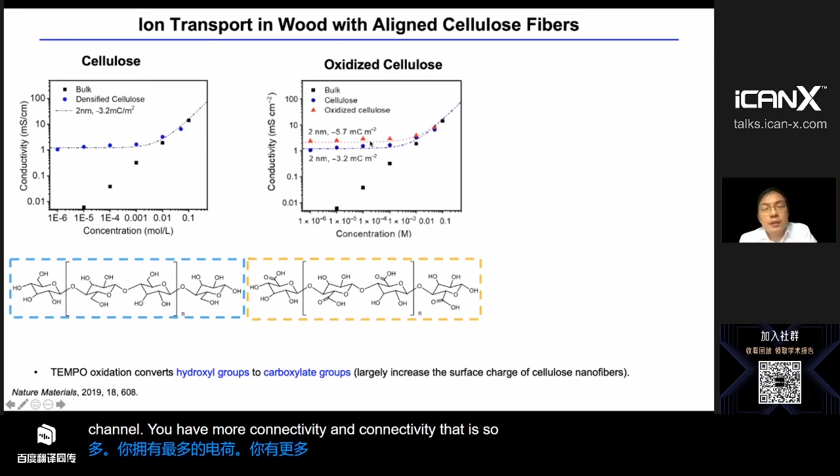You have more conductivity, you have higher conductivity. That is the so-called enhancement of conductivity due to the surface charge effect.

And to use this kind of behavior, we have to block the big channels. So when you do this kind of experiment, we have two choices: we either densify it, or we block the channel by infiltrating some polymer into the big channels. So this is a very quick example to show you how we use this kind of nanoionic behavior using wood.

Remember, the wood is very easy to process. You can cut it into different shapes, different angles. So in this case, we can cut the wood in this way, and the channels are aligned in these directions. And you have what is surface charge, right?

So now let's look at this device, the so-called thermo-ionic electric device. You have the temperature gradient, and the temperature is going to drive the positive ion through this negative channel. So the positive ion is going to be here, the negative ion is going to be here.

So now you have this voltage build up, right? You can charge the double layer, just like you charge a battery. And if you actually have a redox reaction on both sides, you can get continuous operation, just like a battery. So by using this nano channel, we can get a record high Seebeck coefficient.

Because of the very low thermal conductivity, the overall Seebeck efficiency, the Seebeck coefficient, is actually very, very high compared to other ionic-based devices. So we can use this wood to harvest energy from low-grade heat, like a couple of tens of degrees C.

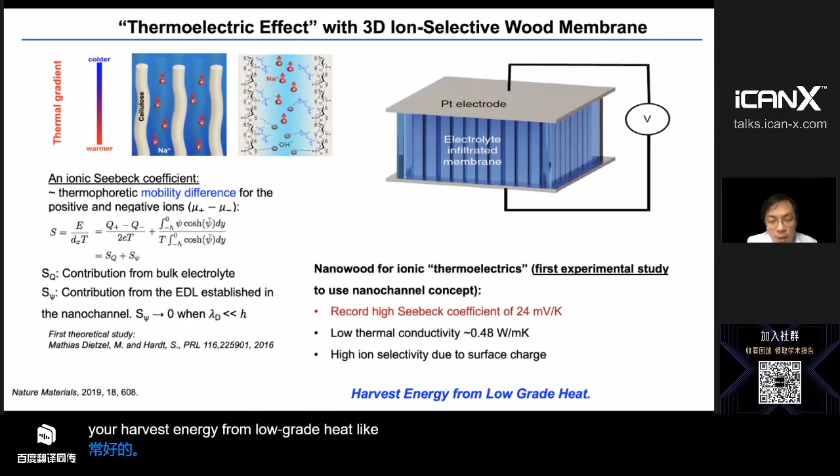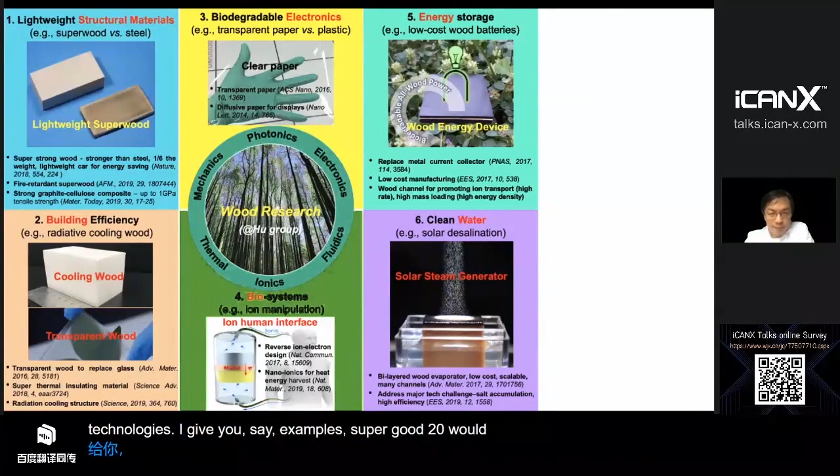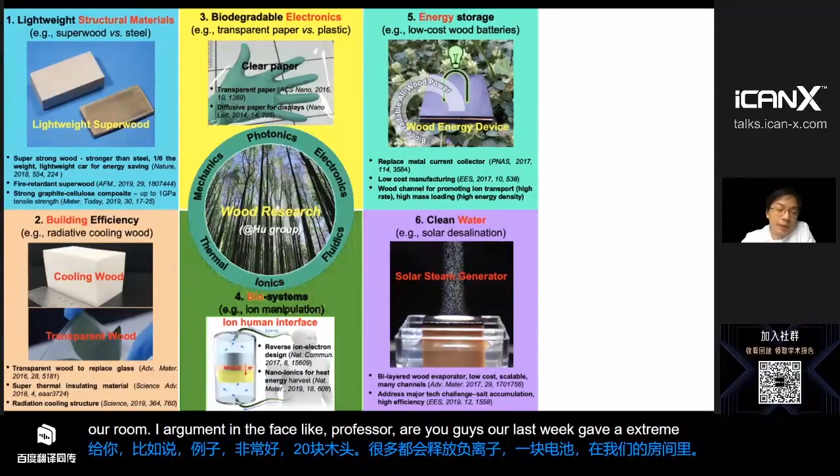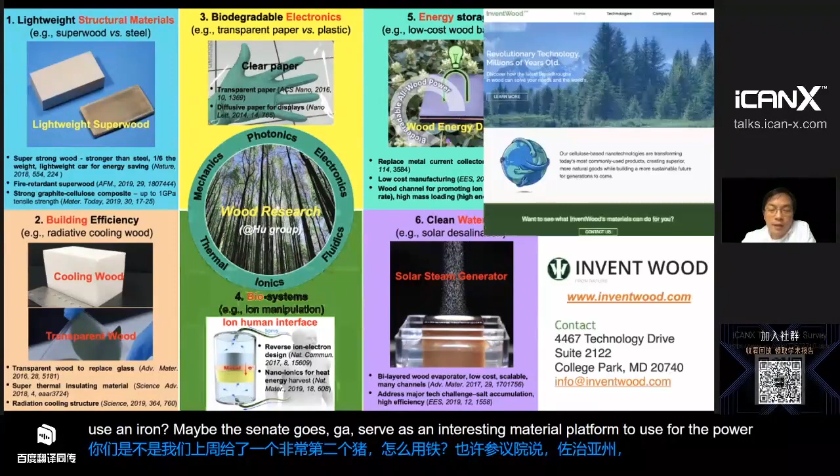As I said, we have a company called Invent Wood to commercialize these technologies. Invent Wood has licensed all the patents related to these wood technologies and the cellulose technologies. And we also look for potential collaborations through the company.

As I said, we want to go beyond sustainability. I showed you a lot of very exciting structures with outstanding performances. And remember, wood is an old material, and people have a lot of knowledge about how to process it—in the paper industry, in the lumber industry.

And from the very bottom, you can engineer the seeds, right? You can do genetic engineering. You can plant wood that has more lignin or less lignin. So I think there are a lot of possibilities.

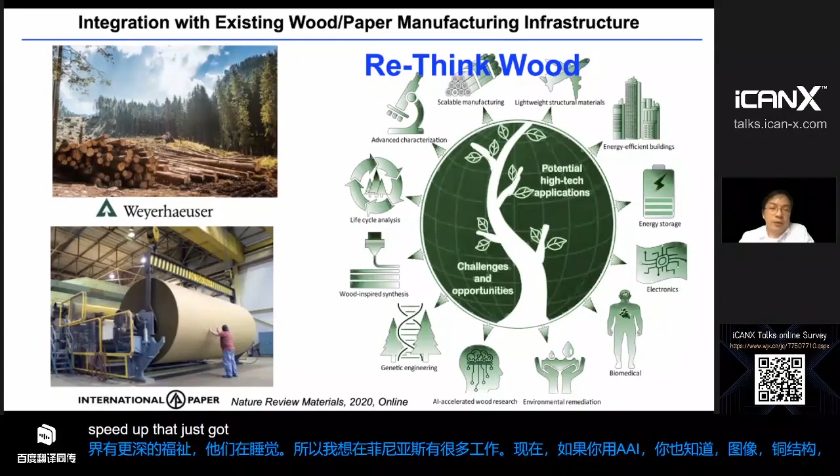And now if you use AI to process images, to couple the structures with the properties, AI can play a very important role to facilitate and speed up the discovery and the manufacturing. So I think there are a lot of possibilities here.

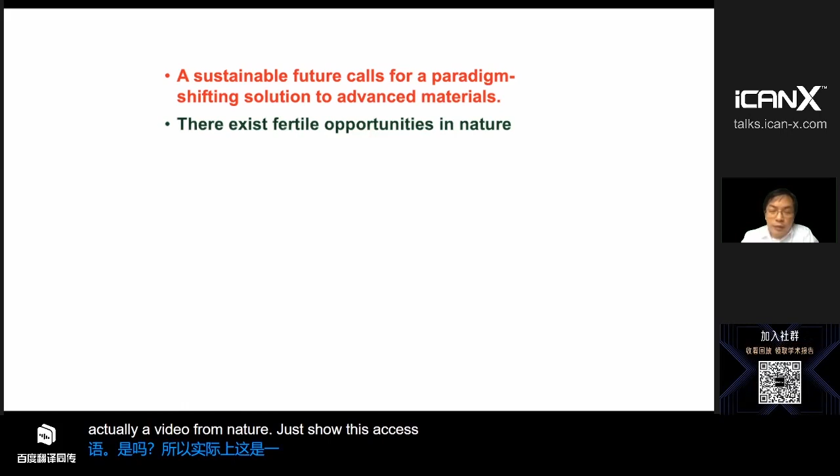So this is actually a slide, a video from Nature, just shared—it's accessible from YouTube. In the future, a sustainable future will need the use of sustainable materials. So the question is, do we have enough materials, right? And this is a video I'll let you watch.

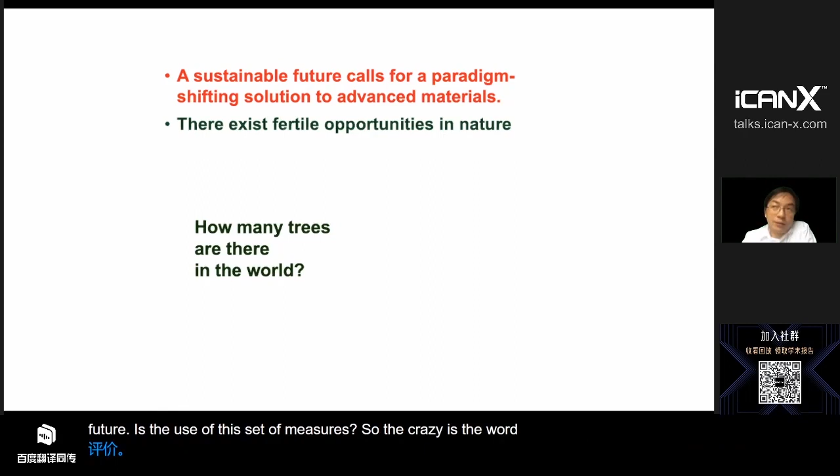How many trees are there in a forest? What about a country? How about the whole world? The answer, we now know, is that our planet is home to 3.04 trillion trees. So on average, we have about 400 trees per person worldwide. So I think that's really enough material for us to play with.

With that, I would like to acknowledge my students. The superwood was really developed by Jianwei and Chaoji, together through collaboration with Professor Teng Li's group. The cooling wood was done by Tian Li—she's going to be a professor at Purdue University—with Shuai Ming, through collaboration with Xiaobo and Ronggui. And the ionic wood was done again by Tian Li, through collaboration with NIST, Dr. Rob Briber's group, and so on.

We also acknowledge some other collaborators. Thank you so much for your attention.

Wow, great, Liangbing, really, really great talk. I enjoyed it very much, this magic wood—you really make a lot of things out of my imagination. So could you please close the share screen? Then we can go to the question part. A lot of people are online waiting for your answers.